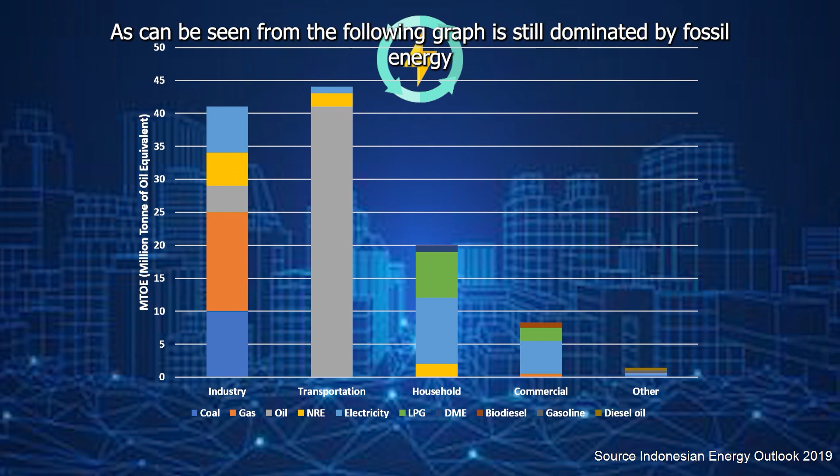First of all, energy is a very crucial thing in our life. In Indonesia, energy is used in most sectors. As can be seen from the following graph, it is still dominated by fossil energy such as coal, gas, oil and so on, followed by electricity.

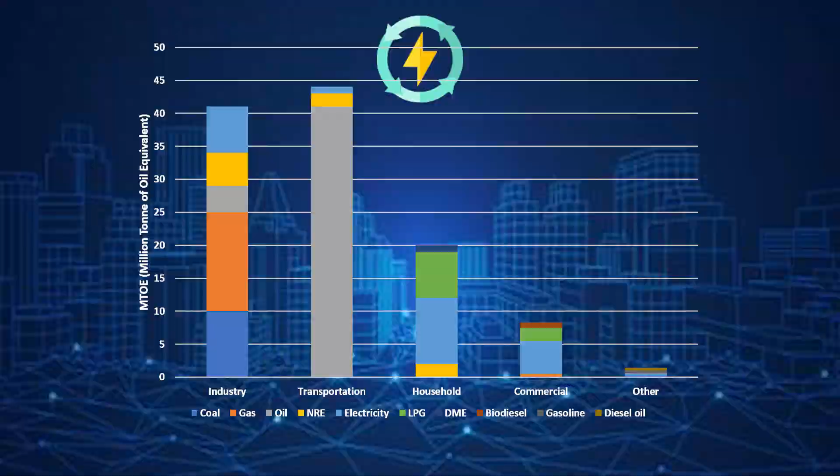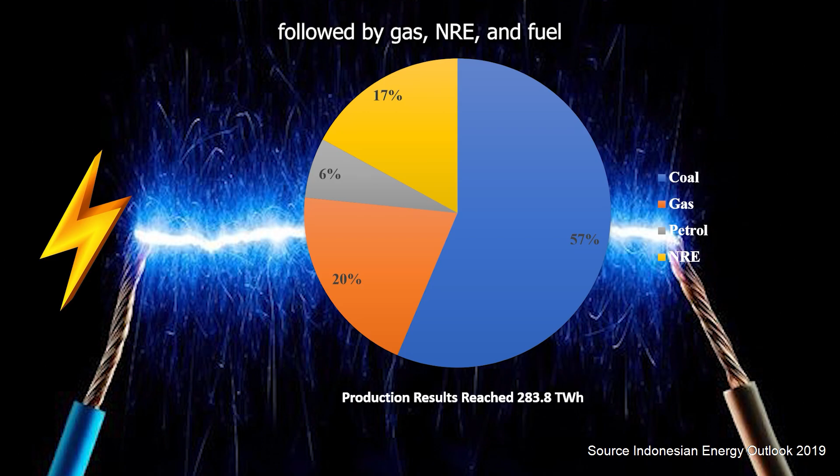But we need to know where the electrical energy comes from. In Indonesia in 2018, the largest producer of electrical energy was PLTU that utilized coal, as can be seen from the following graph, followed by gas, NRE, and fuel.

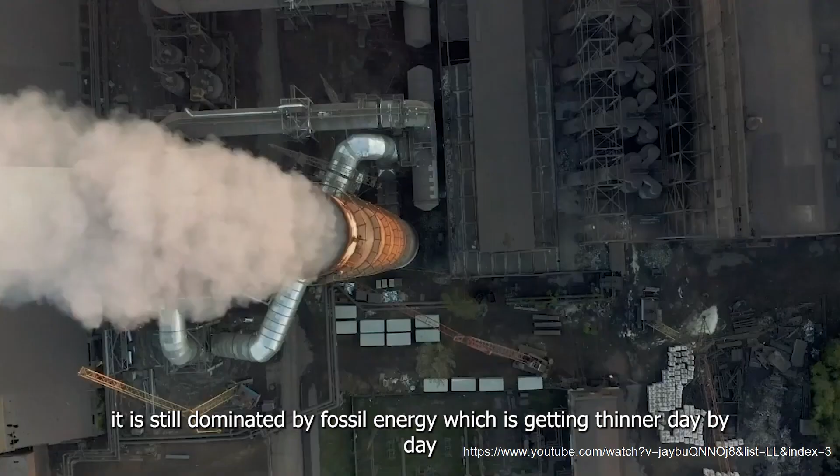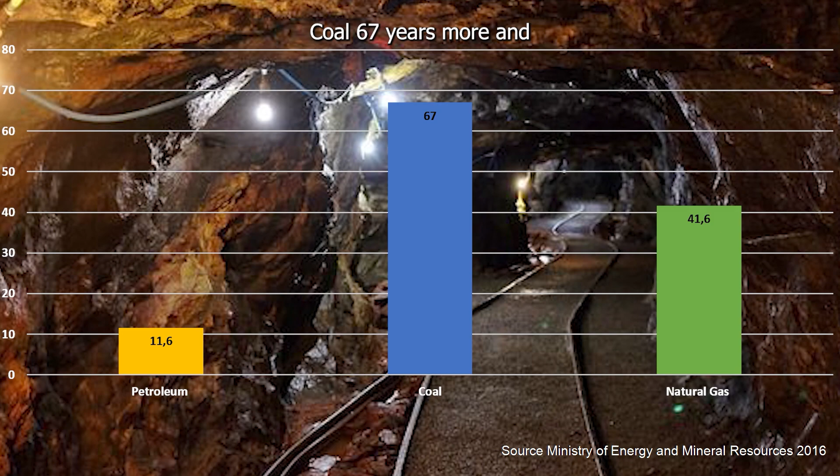It is still dominated by fossil energy, which is getting thinner day by day. With no alternative energy found, it is not impossible that Indonesia will experience an energy crisis. Based on data regarding the availability of fossil energy in Indonesia in 2016, it was found petroleum has 11.6 years more, coal 67 years more, and natural gas 41.6 years more.

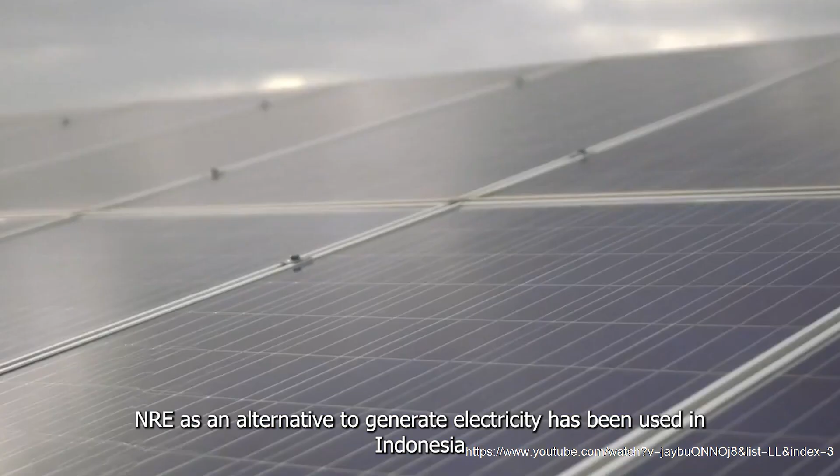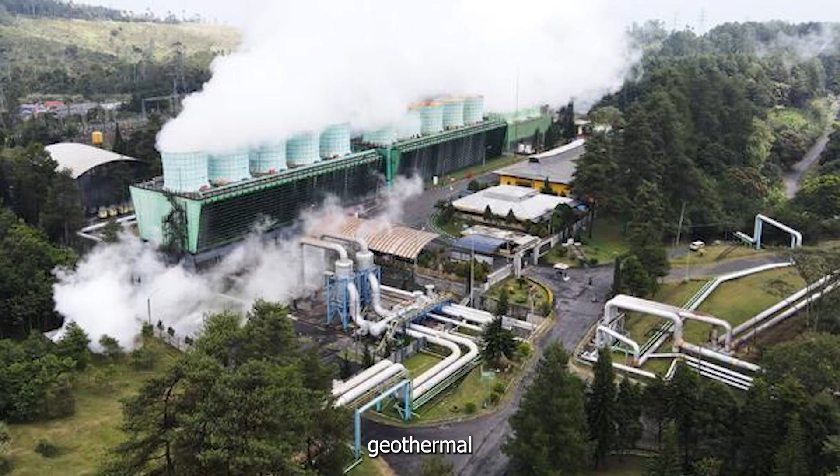NRE as an alternative to generate electricity has been used in Indonesia, but still on a small scale. Examples of renewable energy used in Indonesia are water, wind, geothermal, solar panel, and this is because the use of NRE has certain terms and conditions that must be met.

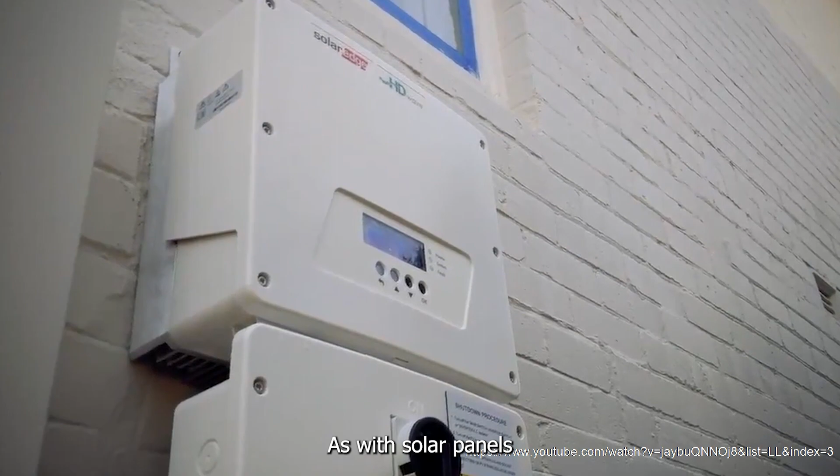As with solar panels, to apply it requires large and empty land so that it does not block the sun's rays from hitting the surface of the solar panel, as shown below.

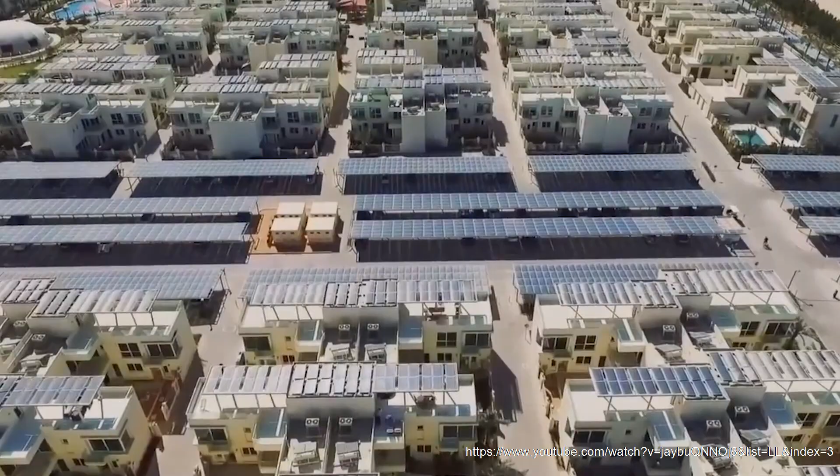As we note, Indonesia has a water area of 62%. NRE that can be utilized from the sea includes tide, wave, thermal and pressure. Pressure is one of the major energy stores in the ocean, but this is still not widely explored and utilized.

For that, we propose a tool that utilizes sea pressure called UDOM. UDOM stands for Up and Down Molecule, because of its molecular-like structure.

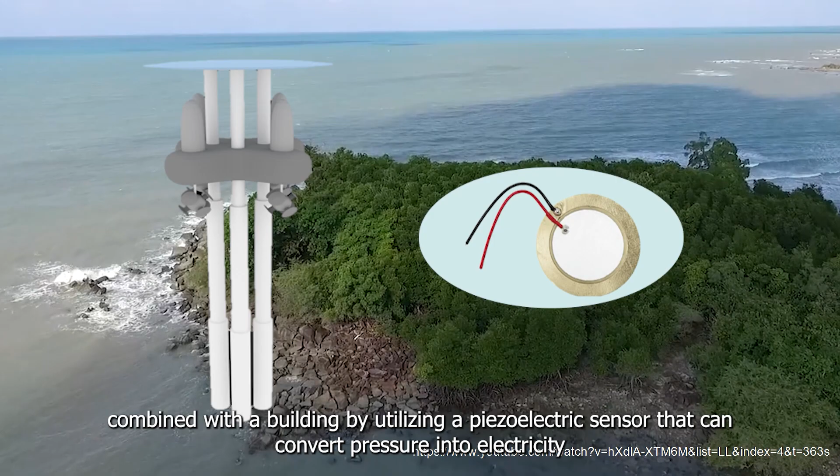It is a product of a deep-sea water pressure power plant combined with a building, utilizing a piezoelectric sensor that can convert pressure into electricity.

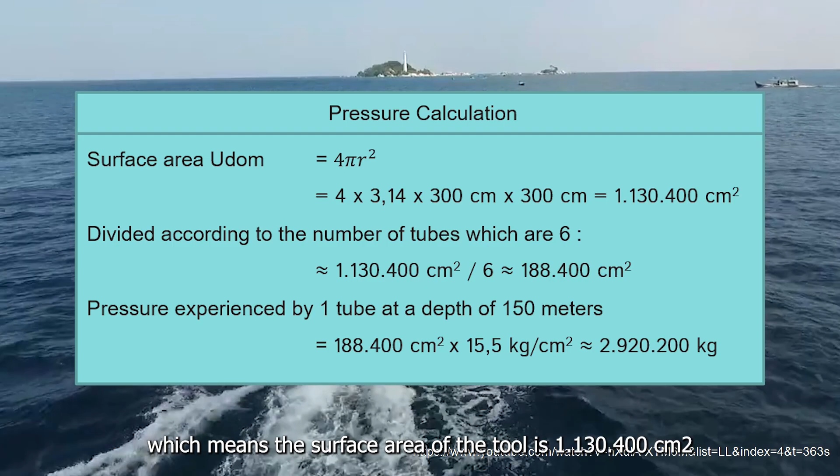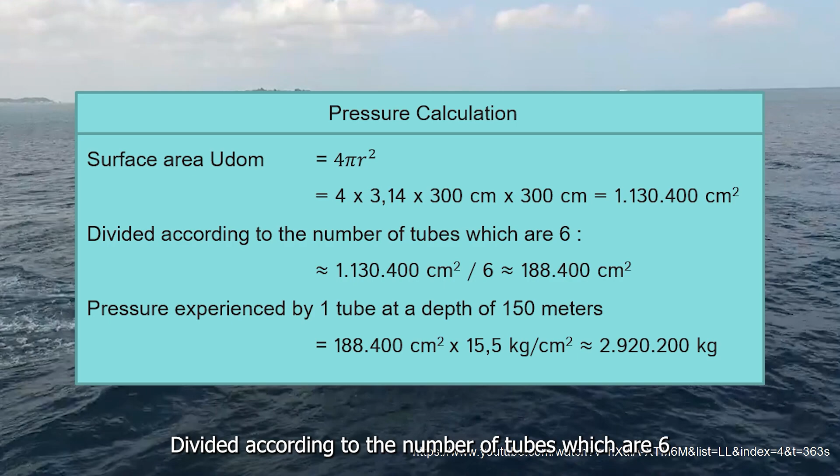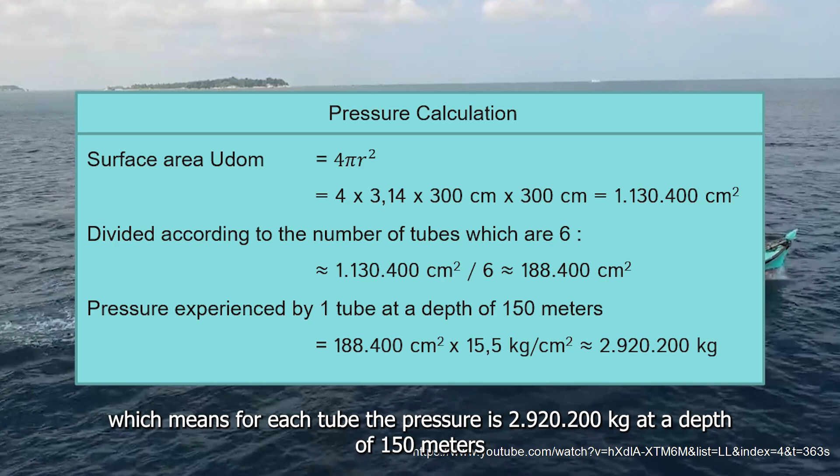The estimated electricity generated on UDOM is as follows. UDOM has a radius of 3 meters, which means the surface area of the tool is 1,130,400 cm square, divided according to the number of tubes, which are 6, and produce 188,400 cm square for each tube, which means for each tube the pressure is 2,920,200 kg at the depth of 150 meters.

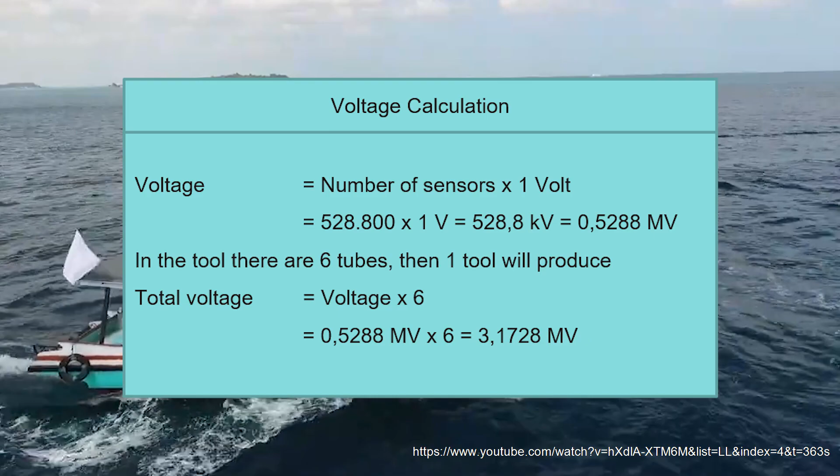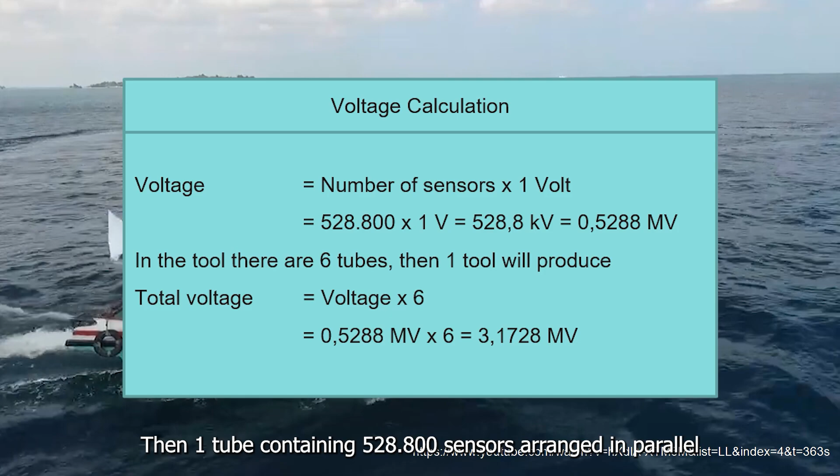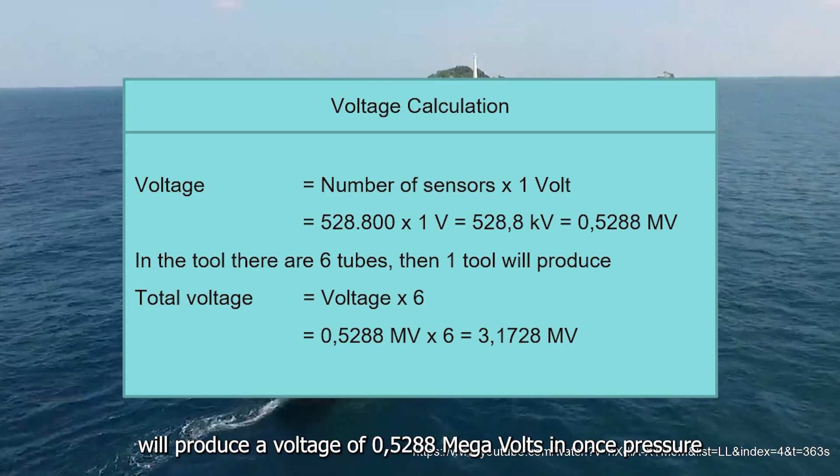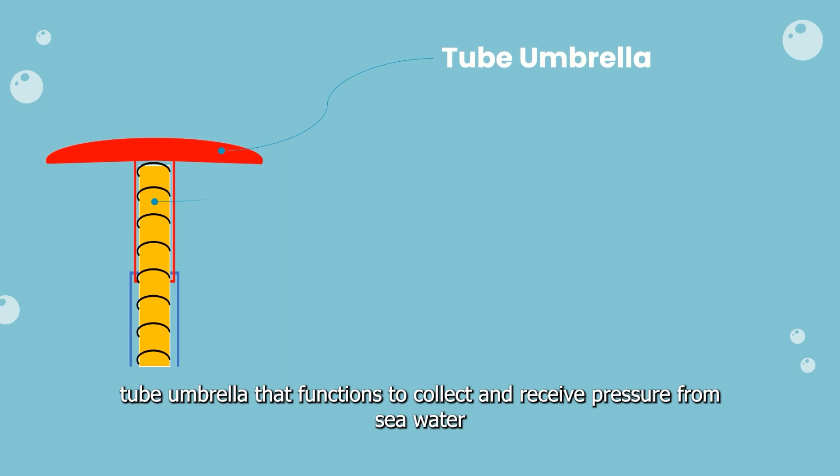These are the components on the tube: the tube umbrella, which functions to collect and receive pressure from seawater so that the pressure obtained will be greater than not using an umbrella tube.

Piezoelectric acts as a pressure converter into electrical energy. The electrical energy produced will be channeled to the electrical appliance room. The outer tube is for piezoelectric housing and protection.

When the tube umbrella is under pressure, the outer tube will enter the inner tube. The spring serves to help restore the original shape of the piezoelectric when the pressure obtained begins to decrease. The inner tube acts as a piezoelectric holder and for the entry of the outer tube.

And these are the components on the ball. There is the valve, which functions to control the entry and exit of water or air into the ballast tank.

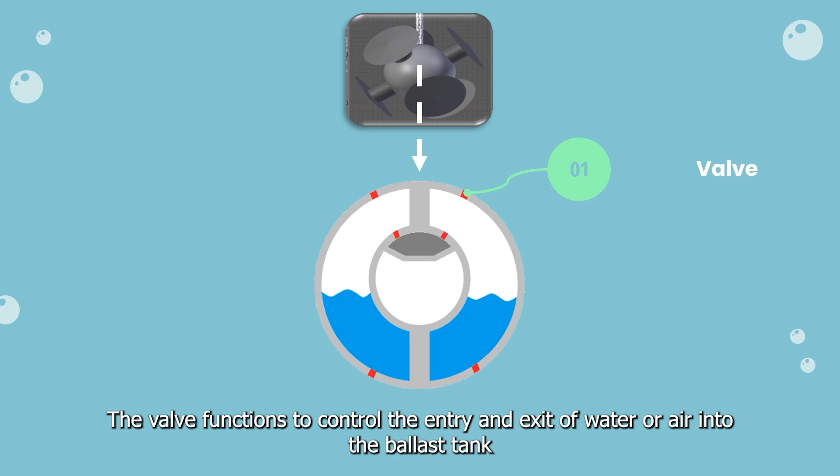The electrical appliance room functions as a place for converting and processing electricity obtained from the piezoelectric. The final output will be delivered to the battery.

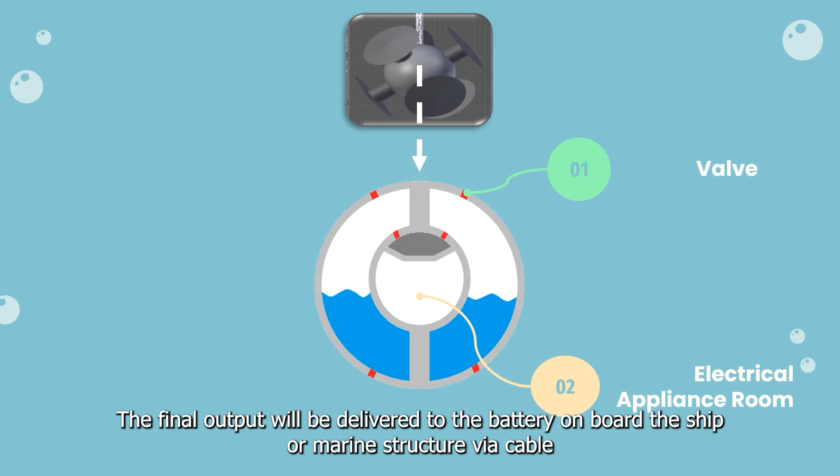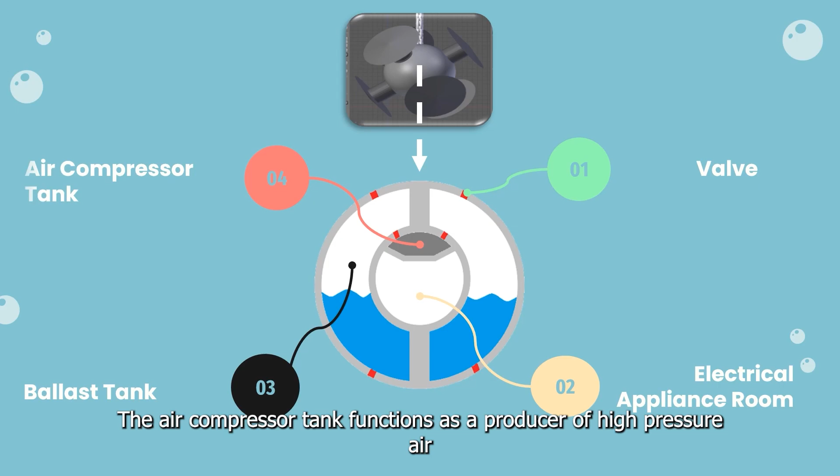The ballast tank functions as a reservoir for incoming water. The air compressor tank functions as a producer of high-pressure air, which is useful for reducing the amount of water in the ballast tank. Because it carries the concept of a submarine, there are three conditions that occur in the core ball.

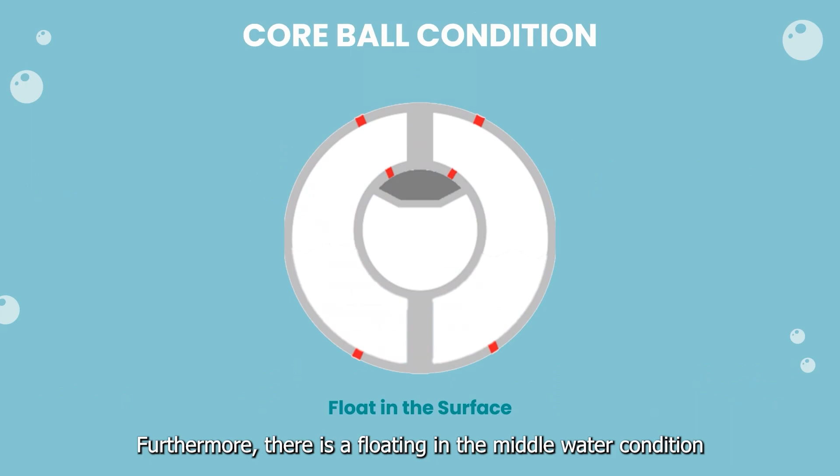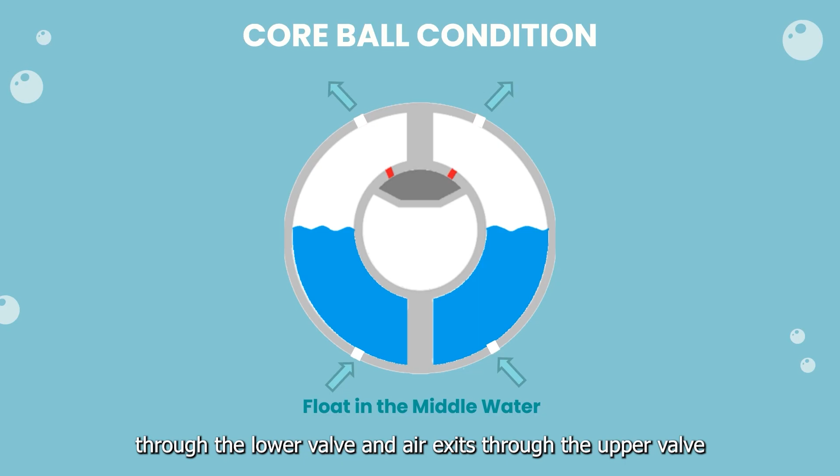The first is floating in the surface water condition, when the ballast tank only contains air. Furthermore, there is the floating in the middle water condition, when the ballast tank begins to fill with water through the lower valve and air exits through the upper valve. And the last condition is sinking.

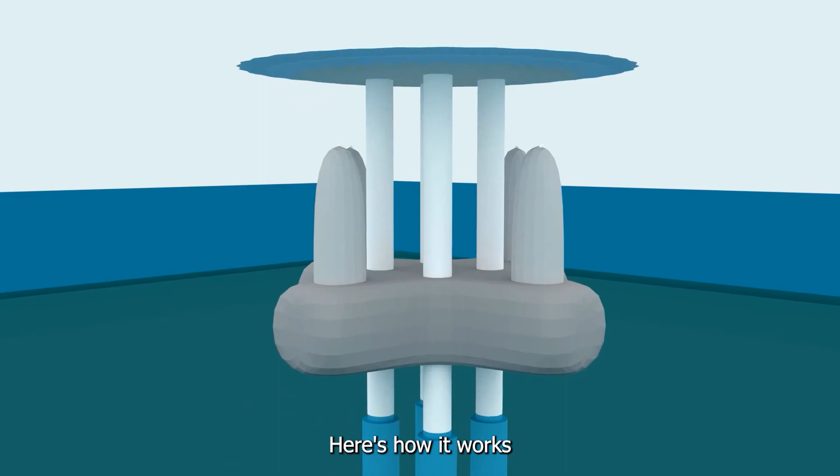So these are the advantages of using UDOM Mark II.

From the advantages and logical calculation, it is hoped that UDOM Mark II can be implemented and commercialized in the future, so that Indonesia and even the whole world can use and experience electricity that comes from renewable energy without restriction, without polluting the environment, and without damaging the earth.